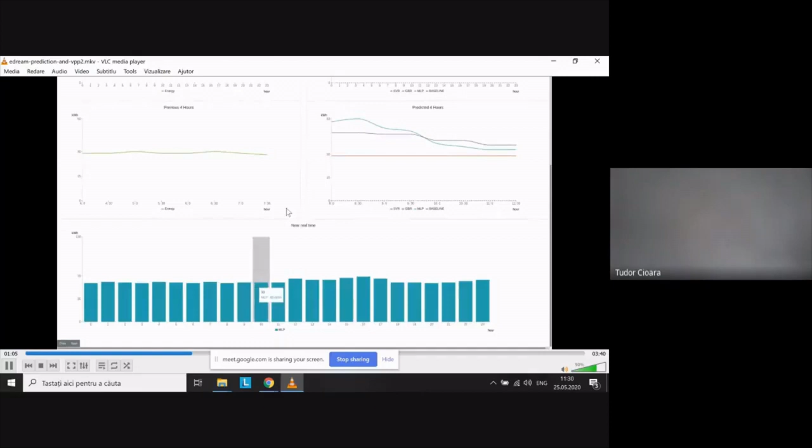Based on the outcome, this information is relevant for the prosumer individually, but also for the other stakeholders, like the aggregator, in case it wants to leverage on its portfolio aggregation.

Beside the energy generation and consumption forecasting, we have implemented forecasting of the energy flexibility of various assets. The flexibility was defined as the capacity to increase or decrease the energy consumption in relation to a calculated baseline. Based on this information, we have constructed a tool through which the flexibility for the day ahead could be forecasted.

In relation to virtual power plants construction, we have constructed, based on the data provided by the ASM Terni pilot, a set of prosumers portfolios. So we have various portfolios through which we can look at their consumption. We have forecasted their individual energy flexibility. And then based on this information, we have used nonlinear process optimization to construct the optimal coalition of such prosumers in order to target specific services. So we have constructed the optimal coalition to trade energy.

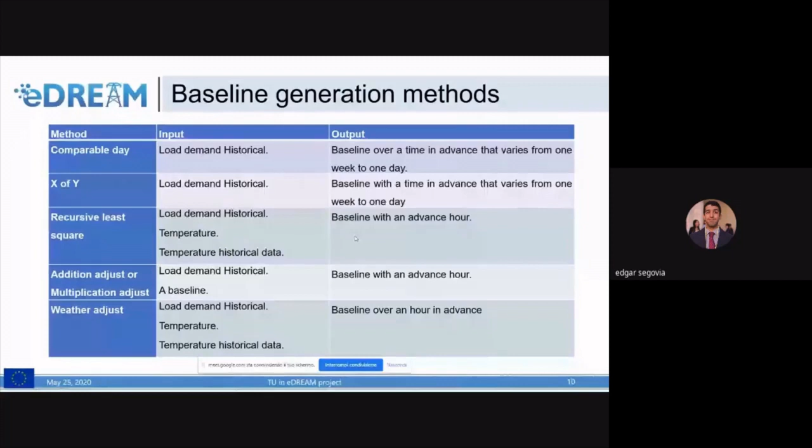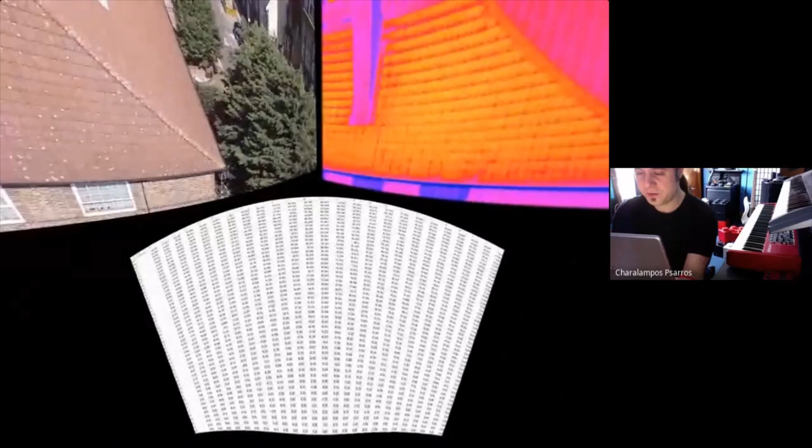So during that scan, we captured both visual and thermal data. This is the visual part of the video, the data we captured, and then on the side is the thermal part, so we can look at any place we want. The numbers on the bottom represent thermal values of every single pixel in the thermal imaging footage.

What we have also done was laser scanning of the area using a 16 laser beam LiDAR scanner. So you can see every dot on the image provides us with the data over here, which is X, Y, Z, several timing values and other data that we use in order to have more accurate measurements and provide us with a model. So at any time we can look at the left, that's the actual laser imaging part, or to the right in order to check the data.

So we did further tests and further scans at one of our other partner sites, the Smart Home at CERTH in Thessaloniki, Greece. So the drone again is flying from one side of the building and capturing visual and also thermal data.

On the top, you can actually see some PV arrays really glowing. And then on the bottom, all of them are thermal values in Celsius, for every single pixel of the thermal footage. What we also did during those scans was create models based on photogrammetry techniques. So this is one of the models created from the smart home at Thessaloniki.

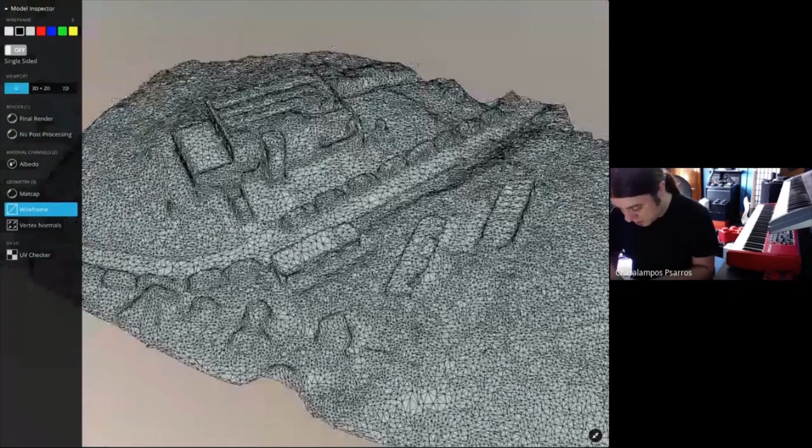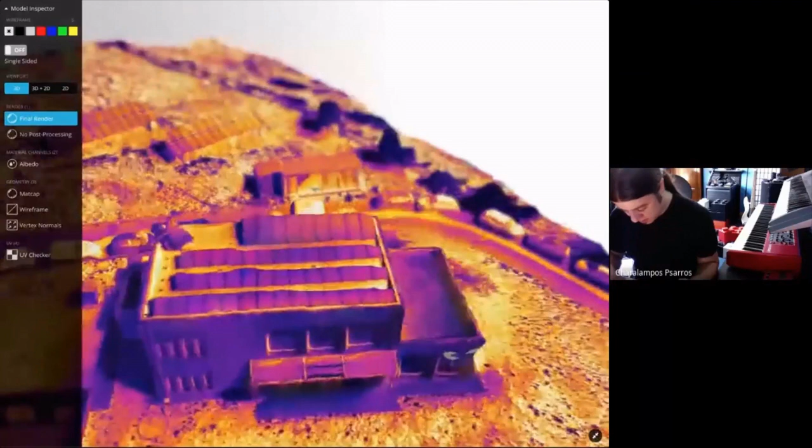And what we also have done was, based on those pictures, we created, let me just switch to 3D mode. This is the resulting geometry of the building. And this is the final result. So we can just observe. And you can see the several assets in the building, and the presentation right after mine will go into more detail on how techniques are used to automatically detect certain assets.

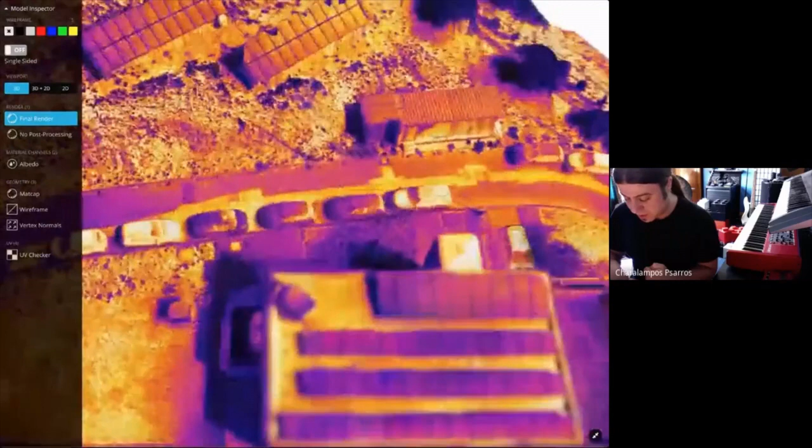For example, here you can see PV arrays. On the corner, there's a photothermal boiler. On this side, there's some HVAC units for air conditioning, and then some more PV arrays over here. What we also have done was we experimented with more techniques in order to be able to observe this model in both virtual and augmented reality.

So right now, for a moment, we'll just switch to the iPad's camera in order to find the plane. Excuse the mess of this place. So, trying to find a flat surface. Sure, here it's just about fine.

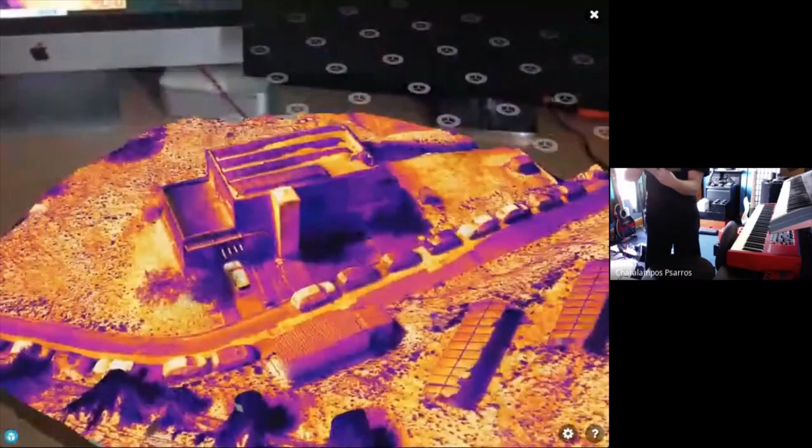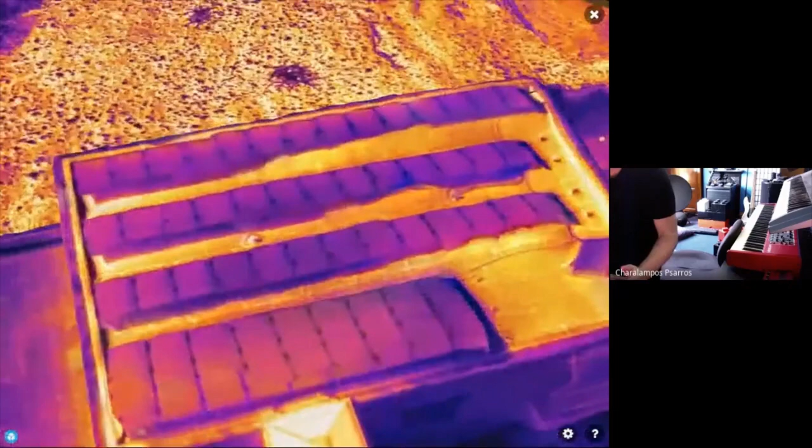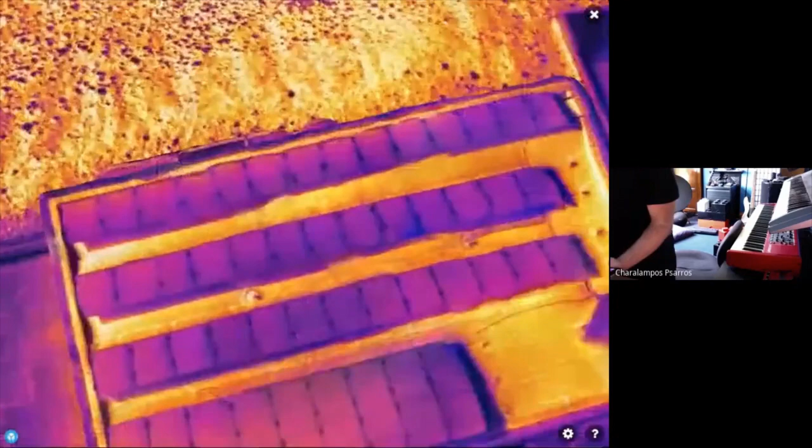So what I'm doing now is physically walking around the building. And if I want to see a specific part, I can just go close to it and then see those arrays, for example, or the photothermal. I can go around it and then check what's going on there for the HVAC units. It's also a useful tool for checking for several malfunctions or any other maintenance tasks. For example, if any of those arrays was malfunctioning, you would see a distinctly different color on it.

And that pretty much concludes the presentation for the aerial survey toolkit from our side.

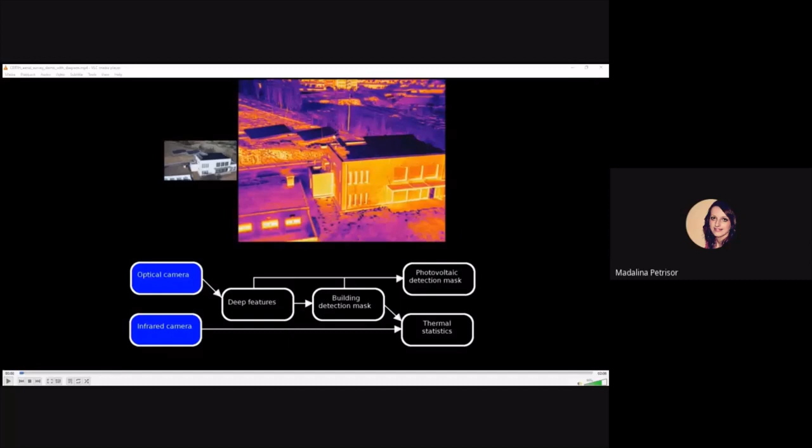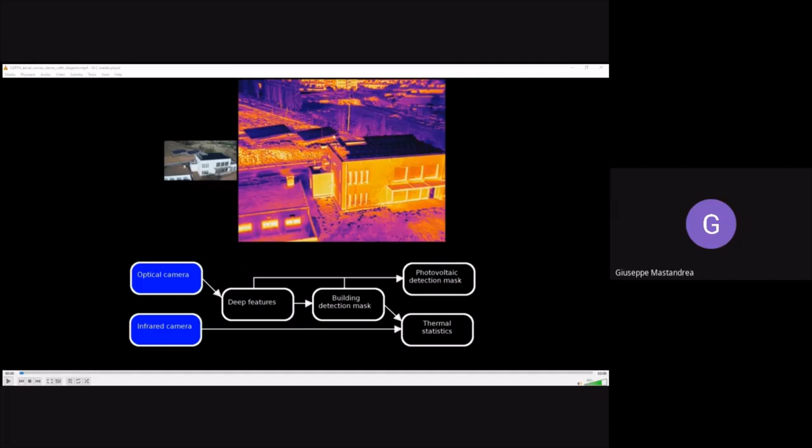I can see Paschalis on the list, but I don't know if he can hear us. Okay, so he is on. Yeah, I believe the sound is working because we just heard sound coming from his user. Yes. Okay, great. Okay, I think that he's writing. No. No, we can't. Okay, Madalina, in that case, if Paschalis doesn't solve the problem, I think that we can move to the next presentation if there are not any questions by the participants. Okay. And postpone the presentation of Paschalis when the problem with the microphone will be solved. Okay, great.

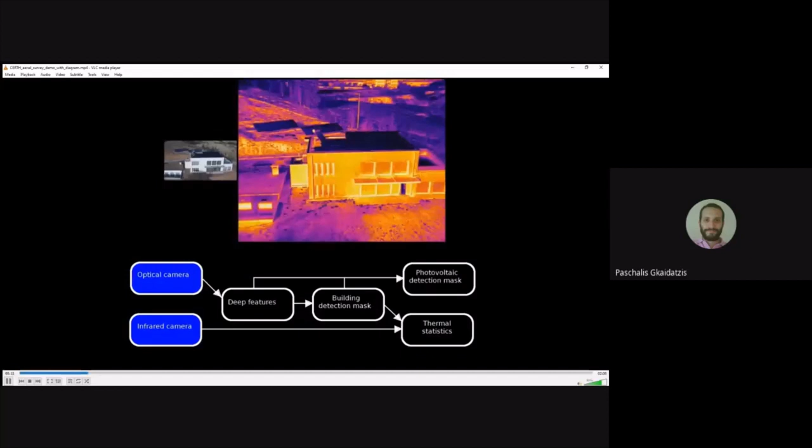Semantic pixel-wise cues were extracted by using a deep learning technique called feature extraction. This involves the use of a state-of-the-art pre-trained neural network, and in this visualization, deep features seen in the right image are juxtaposed on the corresponding optical video frame on the left, and similar colors denote semantically similar content.

Following, an unsupervised learning technique is then applied on deep features, that is PCA and K-means, in order to cluster each frame into semantically coherent entities. So in this manner, the main structure, the smart home, is identified and is the estimated mask shown in this frame here. The detected mask is then used to select only the relevant thermal intensity values. When computing thermal intensity statistics, note that this makes a significant difference, and this allows us to compute accurate temperature statistics on the structure of interest.

Therefore, further processing on the detected mask and the optical camera input leads to detection of the PV element assets that are situated on the building's rooftop. You can see here. The full processing pipeline was written in Python using TensorFlow and NumPy and SciPy, if I am pronouncing them correctly. And the video was made using a UAV at the CERTH facilities.

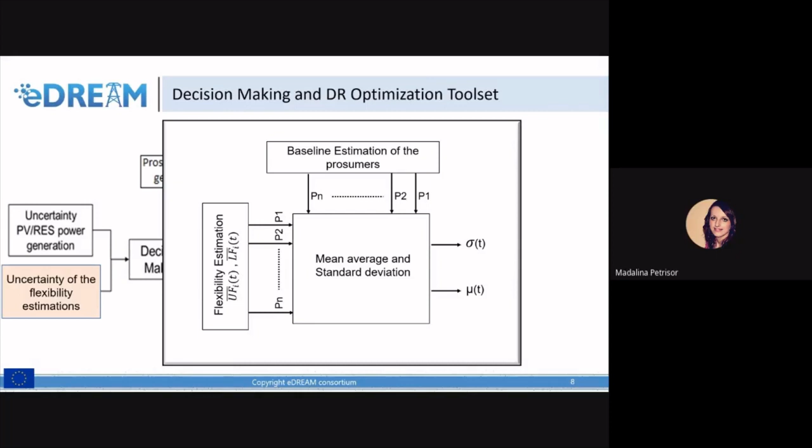Based on the uncertainty analysis of PV generation forecast and flexibility estimation and the risk index selected by the operator, the decision-making module will calculate the power reserve, which is then used by the optimization.

The idea of the optimization is that the optimization algorithm will select the optimal set of generators which generate the required demand, and are also able to ramp up and down to balance the variations of the PV generations and flexibility provided by DR programs. The optimization problem is formulated as a customized unit commitment and economic load dispatch problem,

and the objective is to minimize the fuel cost, where in unit commitment optimization, the operation schedule of the dispatchable generators is evaluated, which means identifying which generation unit will be on and which will be off. Then in economic load dispatch optimization, the set points of these units are calculated.

As the independent variables of unit commitment are discrete and the independent variables of the economic load dispatch problem are continuous, an algorithm which can deal with both kinds of variables is needed. Or we might use two different algorithms, one to solve unit commitment and another one to solve the economic load dispatch problem. To solve the optimization problem, a series of optimization mechanisms based on the GenOpt optimization program and the method of Lagrange multipliers and priority lists were developed.

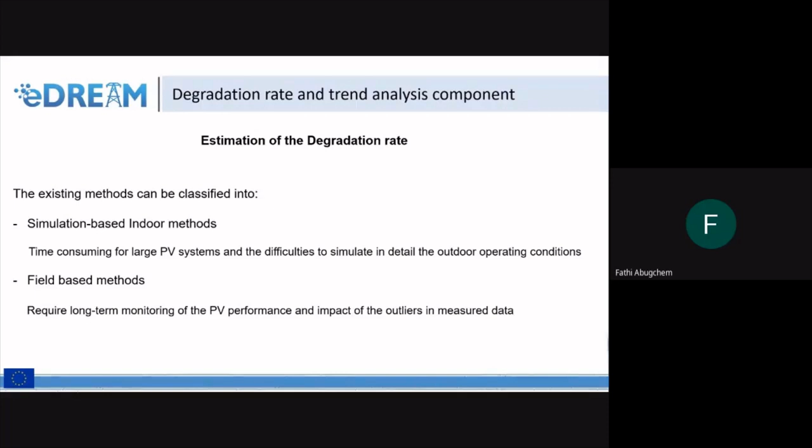In indoor-based, the PV needs to be transported to the testing facility, which is time-consuming and imposes the risk of failure due to mishandling. On the other hand, the field-based requires long-term monitoring. Between 3 to 5 years data is required to obtain accurate estimation. Also, methods to reduce the impact of the outliers are needed.

When a field-based method is used, a statistical technique is required to calculate the degradation rate. Perhaps the most used one in the literature is the linear regression. However, this method is very sensitive to outliers. For this reason, we have implemented a classical seasonal decomposition method, which is considered much more robust to the outliers than

linear regression. The main concept of the classical seasonal decomposition method is that the long-term trend of the PV performance data series consists of three components: trend, seasonality, and residual. And the idea is to isolate the seasonality from the time series and apply a linear regression on the deseasonalized data to obtain the DR.

To reduce the impact of the outliers, a filter based on the average and standard deviation of all similar months was used. The data points which exceed or fall below specific limits are identified as outliers. These points are replaced by estimated values calculated based on the power generation of the PV at the same time period of the other years.

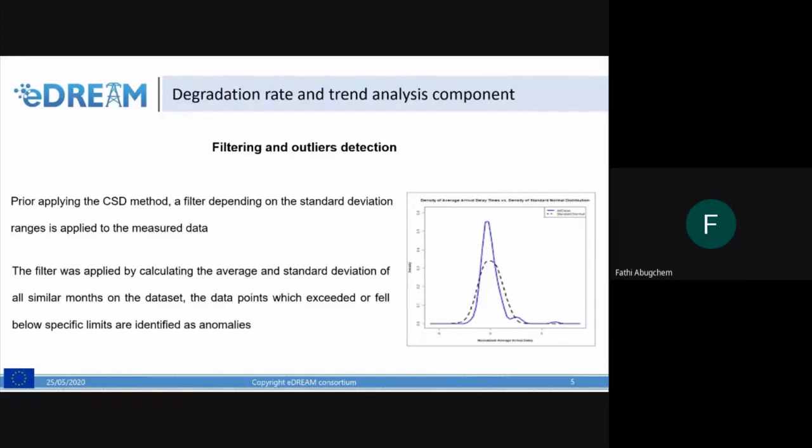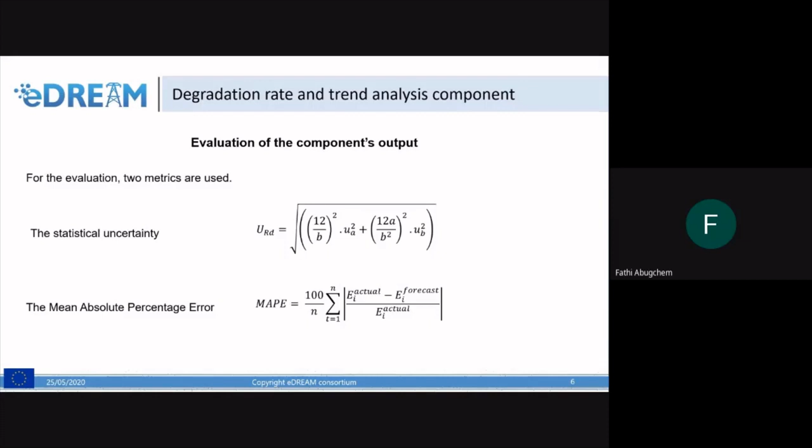We start the calculation by uploading the data. Let us go to the Kiwi data, site A. We can select prosumers. If there is more than one prosumer in the data file, they will be listed here. So we have just one prosumer in this file. Then select the method. We have implemented two methods. The first one is multiplicative decomposition, and the other one is additive decomposition. So let us go for additive.

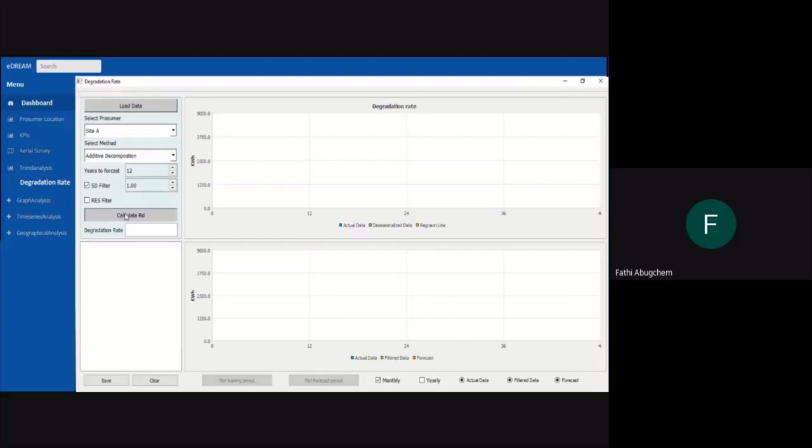Then we select how many years we would like to forecast. Select the SD filter. Keep the constant as it is, 1. Then we calculate the degradation. The data related to calculation are presented here in this window. We can see that the degradation is 1.3, the uncertainty is 0.0088, MAPE is 15.1, yearly MAPE is 2.6.

In the upper window, we can see the blue line presents the measured data, the green line presents the trend extracted from it, and the yellow line presents the regression line, which is used to estimate the degradation rate.

In the bottom window here, we see the blue line presents the measured data, whereas the green line presents the data after filtering. We can see here that the filter has identified this as an outlier, so it replaces it with some other values. The yellow line presents the forecasts.

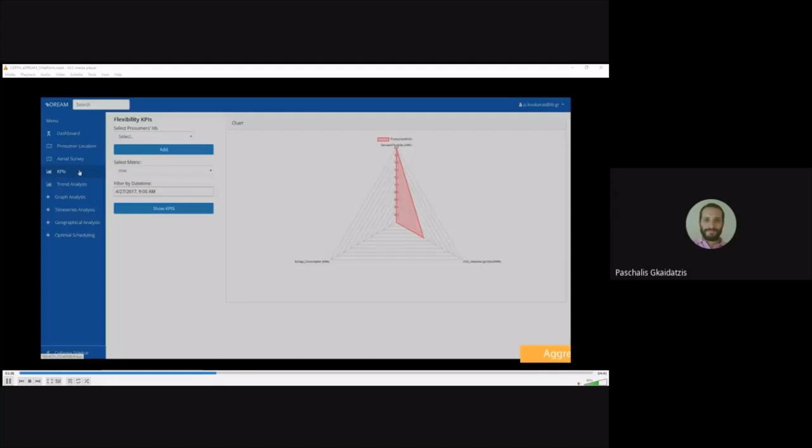In the second section, we can see the aggregator monitoring its DR portfolio. And here we can see him selecting various prosumers and comparing them with one another, and with the min, max, and average value of the DR portfolio.

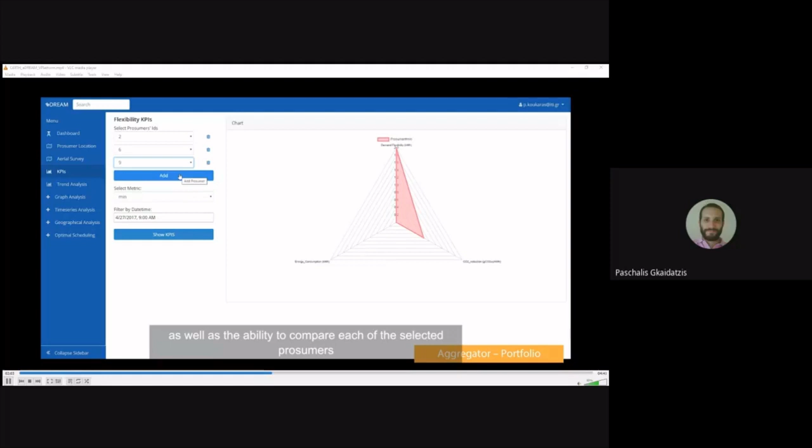The KPIs in the diagram are the CO2 reduction, the energy consumption, and the demand flexibility of each of the users selected. And this is for a specific date and time.